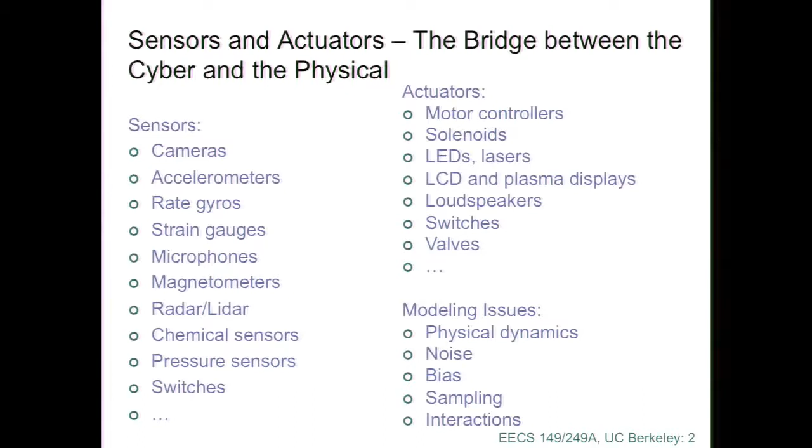Now, I'd like to start out today's lecture with a challenge problem. And this is a challenge problem for you guys. You're going to be hitting the world of practicing engineers or researchers or scientists very soon, if you aren't already there. And you are going to solve this problem, okay? In fact, I'd be willing to bet several of you in the room will be working on the technology that will prevent this kind of thing from ever happening again.

Humans are pretty good sensors, but engineers can build better sensors, and we're well on our way to doing that, okay? And if you can integrate those sensors with the machines and develop the control systems, you can actually prevent this kind of thing from happening. So this is happening as we speak. So cars are getting a huge variety of different sensors on them. They have been for some time. I mean, even the Model T Ford had a temperature sensor, okay?

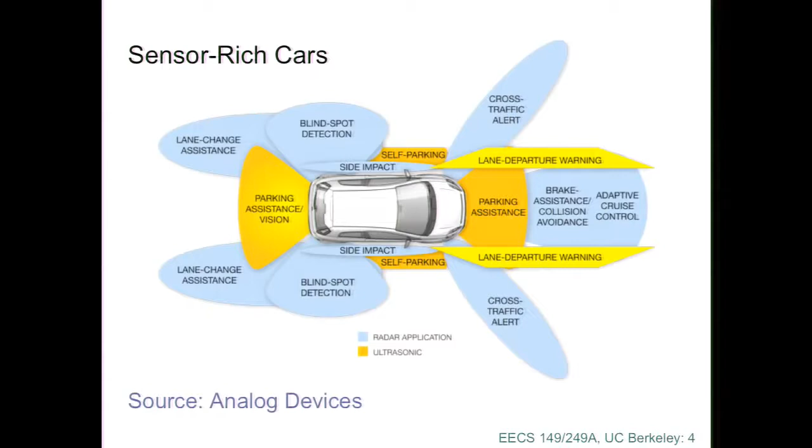Now, there, the feedback control system was a dial on the dashboard. If it exceeded a threshold, a human was expected to turn off the car because otherwise the engine would be damaged, right? You still needed humans. In that case, the human was the actuator, okay, to react to what the sensor was detecting. But we're going to see the humans play a diminishing role.

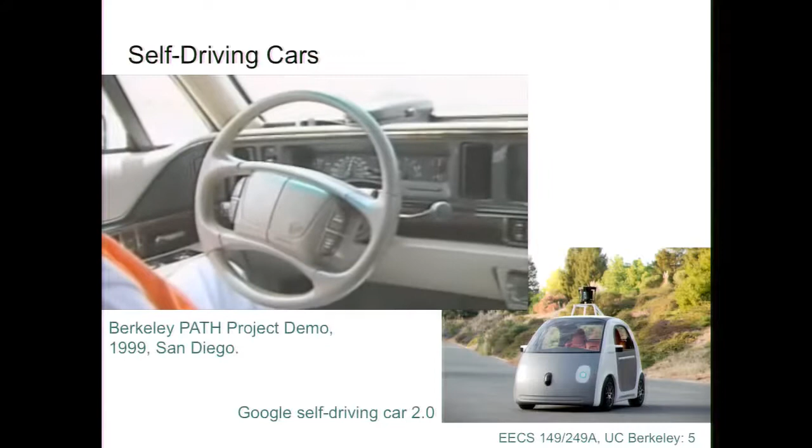And if you think this is such a brand new thing, this video was from a demonstration of a project, and it was filmed in 1999. Okay, that's 15 years ago. How old were you guys then? Okay, not many of you, you were kind of young, right? So self-driving cars were not invented by Google, but the technology has improved tremendously.

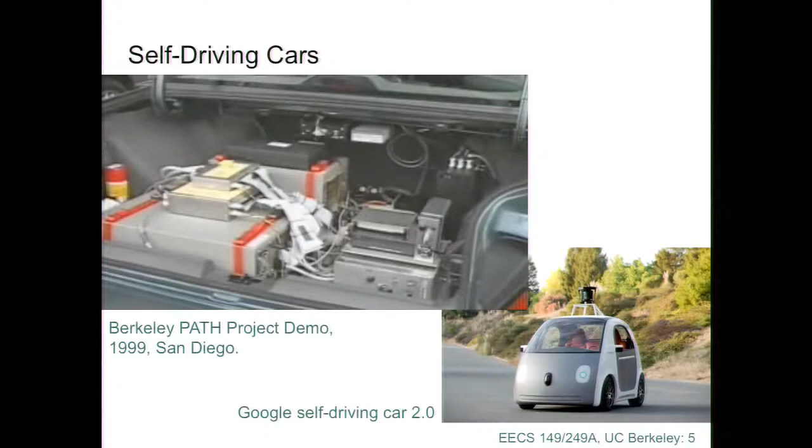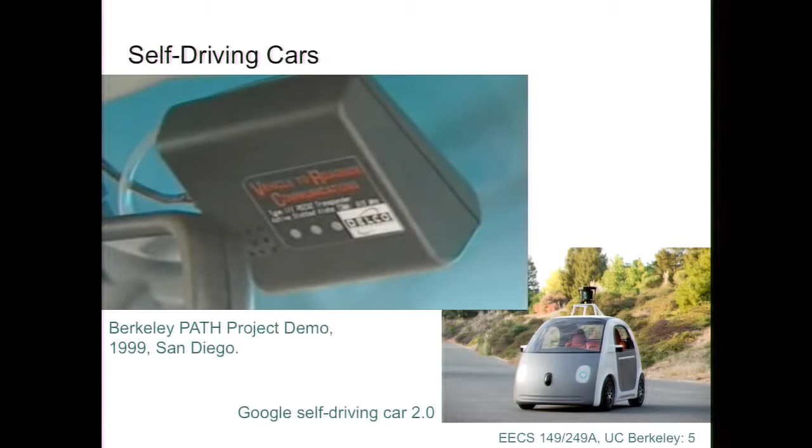When the PATH project developed this demonstration effort, first of all, they were using cars that were not drive-by-wire cars. So the steering was controlled by mechanical actuators. So they had to retrofit this steering with comb gears. They had a bunch of mechanical engineers that would retrofit this. That's the trunk full of computing equipment. Okay, so it pretty much filled up the whole trunk. And they had to retrofit it with the actuators that would control the car. But they were able to demonstrate driverless platooning on San Diego highways in 1999.

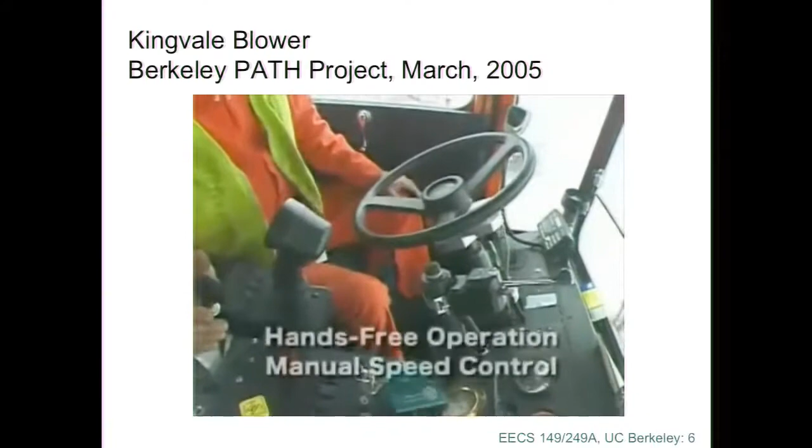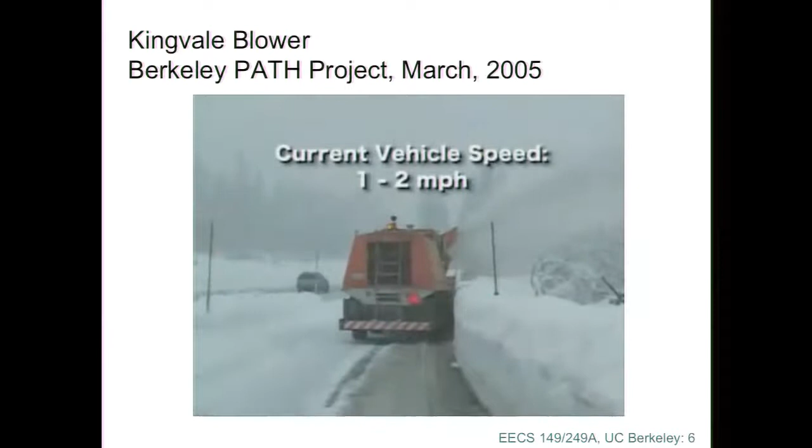Okay, that particular technology that they developed in that project has actually been deployed since 2005 in this context. It's used to drive snowplows in the Sierra. How many of you have driven over Route 80 in the winter in a snowstorm? Okay, if you haven't done it, I recommend it. It's pretty exciting. You can get absolute whiteout conditions, okay?

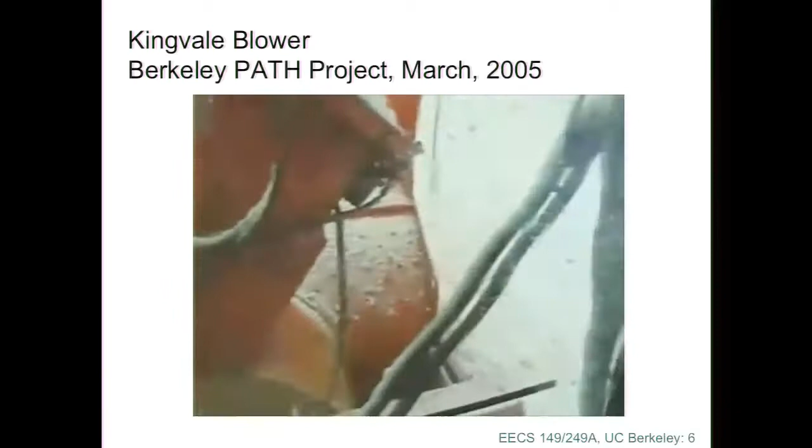And these snowplows have been outfitted with a system that will steer them to quite high precision. It's a little difficult to see it here, but this snowplow is 1 to 3 inches away from the guardrail, okay? And you can't even see the guardrail. No idea where it is, right? So let me ask you this. What are the sensors that are being used to control this snowplow?

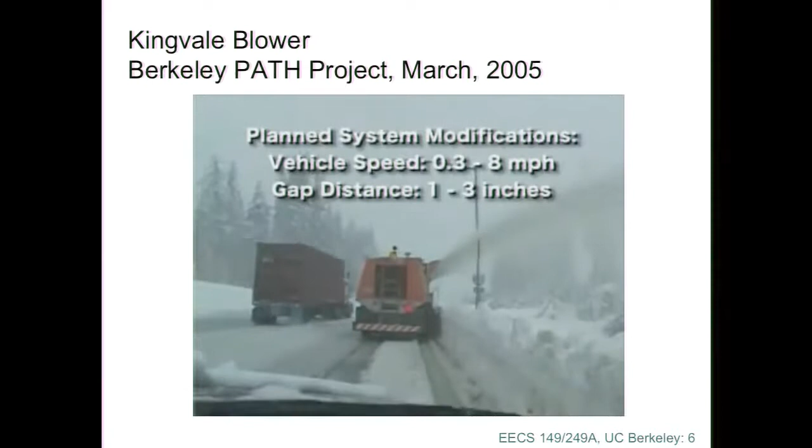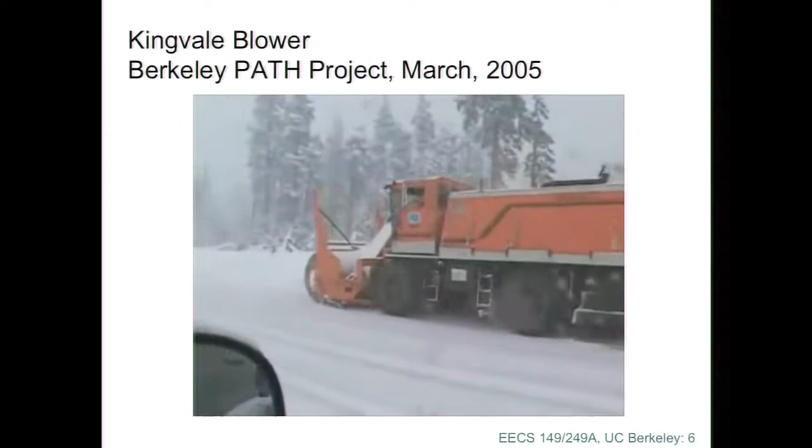Let's hear some suggestions. Yes? Passive IR. Sorry? Passive IR. Passive IR? No. Because you remember you can get whiteout conditions. That'll pretty much block any infrared signal. Yeah? GPS? GPS? No. Can't get 1 to 3 inches of precision. X-ray? What? X-ray. Oh, that would be an interesting one.

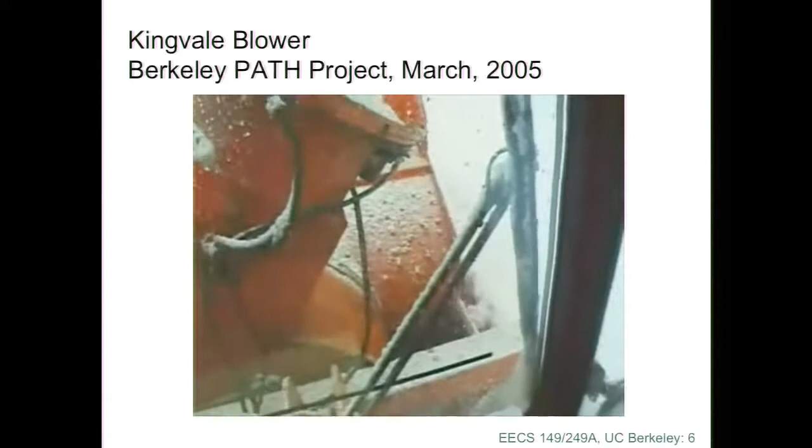To be able to see through whiteout conditions, maybe. But remember, what would you be seeing? You'd probably be looking for the guardrail, but guardrails are imperfect. They have gaps, they have dents. Where do you think the dents come from? Drivers driving over the Sierras in a snowstorm. So actually seeing the guardrail isn't going to help all that much.

Ultrasound? I'm not sure, but I doubt that ultrasound propagates too well through snow. In fact, have you ever noticed in a snowstorm how things get very quiet? I think snow is a really good sound absorber.

Inductive proximity sensing? That would be an interesting one, but again that would rely on the guardrail being undented and continuous. You'd need something that touches the guardrail all the time. Something that touches the guardrail? No, that would be foiled by ice, probably.

Other ideas? Yes. Radio beacons. Yeah, you could do that. You could make your own little localization system and put radio beacons. It would be an expensive solution though, because you have to power the radio beacons, which means doing a lot of wiring onto miles and miles of road.

What's your name? Alex. You nailed it. That's what they did. They just drilled a hole in the road every 10 feet or so, dropped a magnet in. 10 feet—why 10 feet? Well...

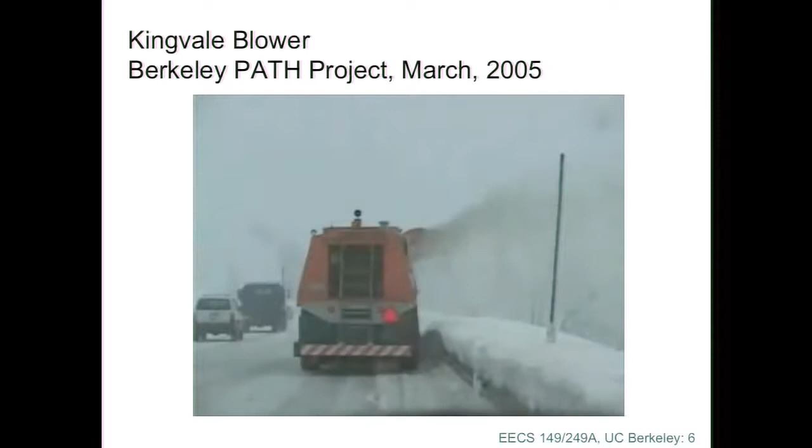In theory, you've all taken EE20, you've looked at the aliasing phenomenon. Roads in the Sierras are sinusoids, to a first approximation. And if you sample with a sampling period of 10 feet—given that roads aren't really high-frequency sinusoids, because cars don't deal with high-frequency sinusoids very well—every 10 feet is a reasonable period for sampling. And that's what they did.

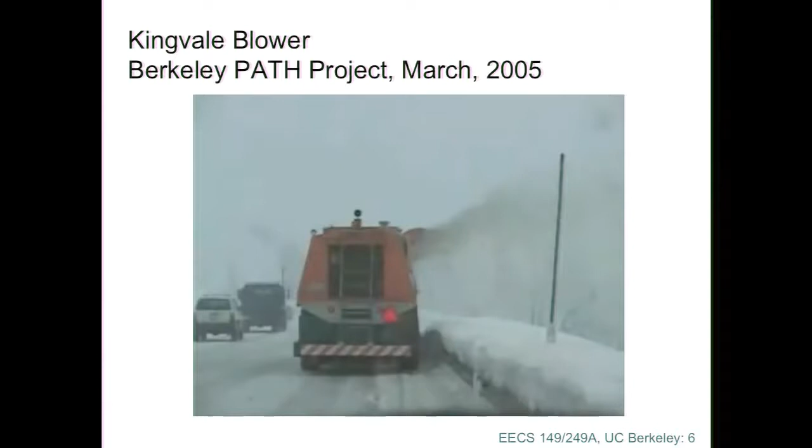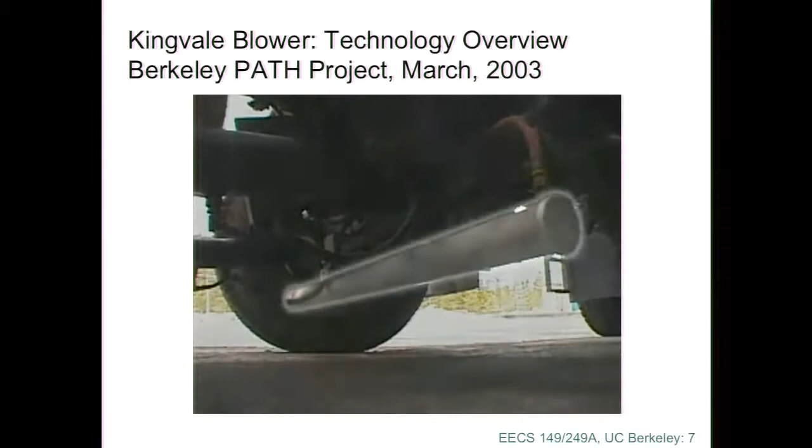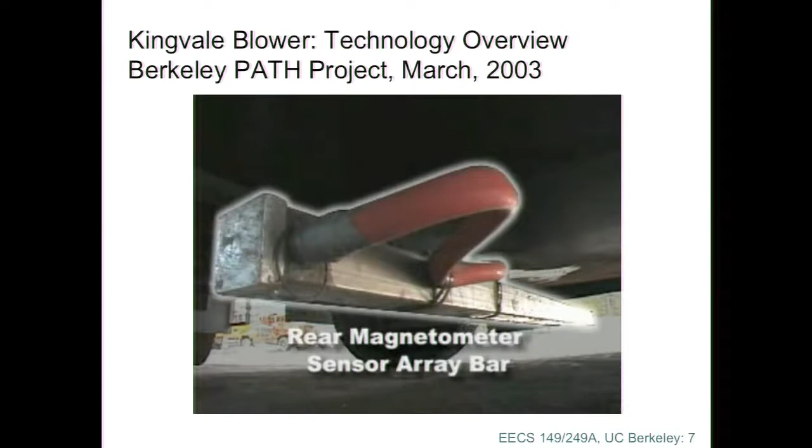So they equipped these snowplows—I'll start up this video—this is a bar that they put under the snowplow that has a bunch of magnetometers in it. And then they have a control system that just tries to keep the magnet in the middle of the snowplow. You can get the 3 to 4 inches of precision you need to get close to the guardrail with that.

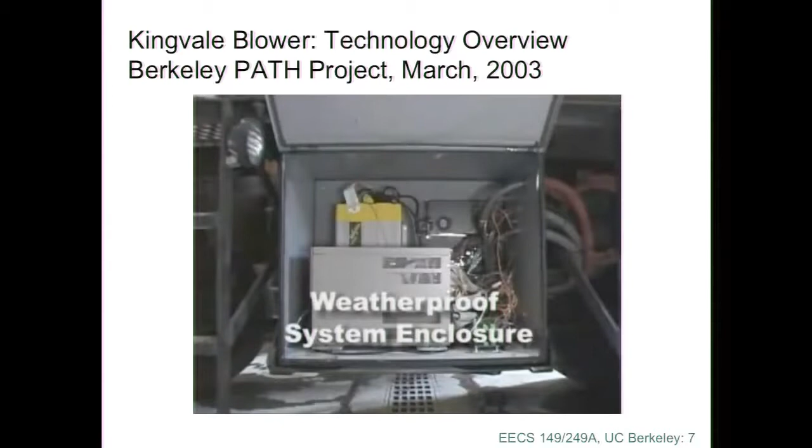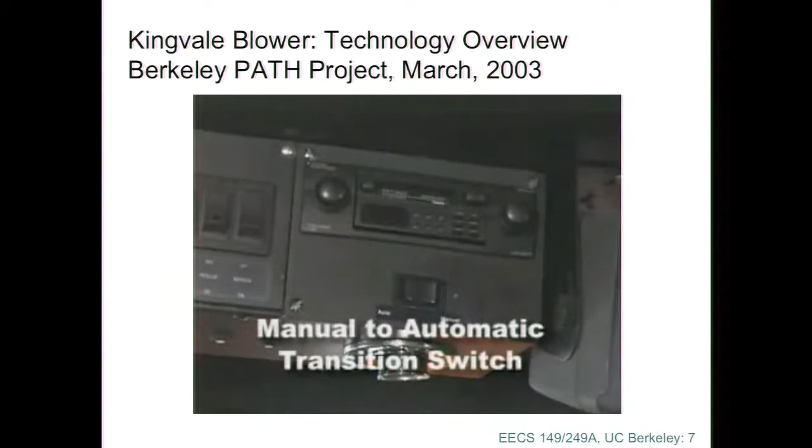So part of the art of working with cyber-physical systems is figuring out what the best sensing and actuation mechanisms are that are available to you. Sometimes incredibly simple sensors will work really, really well, and sometimes you need something much more elaborate.

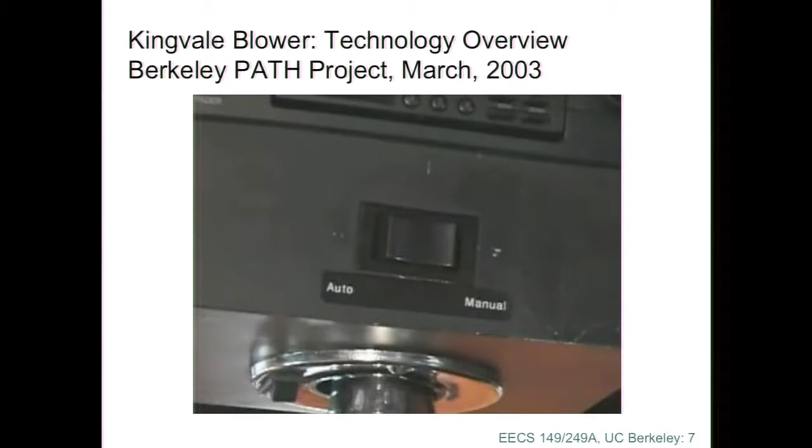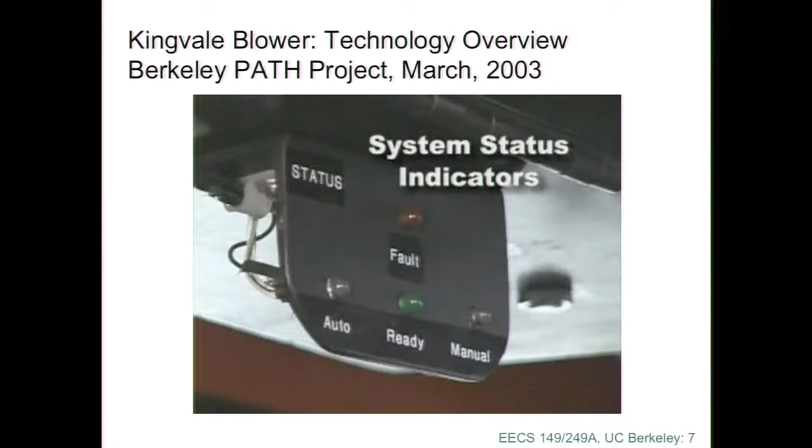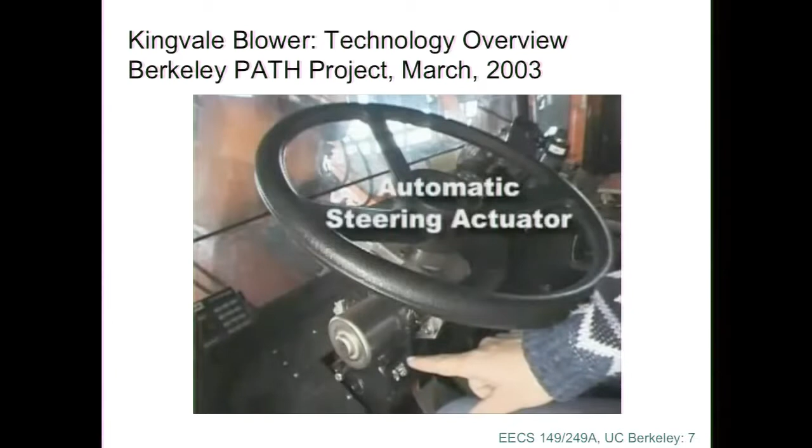GPS would be an extremely elaborate solution for this, and it would require precisions that would also require adding local GPS radio beacons. You can get 3 to 4 inches of precision with GPS if you add local beacons, and that might be a reasonable solution today—it might even be cost-effective because of the ubiquity of GPS.

But the solution that they picked here was relatively simple. It did require some modification of the infrastructure to embed those magnets, but the magnets don't require any maintenance. So infrastructure that doesn't require maintenance is generally better than infrastructure that does.

How do magnetometers work? They use an effect that's been known about since 1879, when Edwin Hall discovered it. It's called the Hall effect, which is simply that if you run a current through a conductor—a plate sitting in a magnetic field—the electrons get deflected by that magnetic field. They tend to prefer to go along one side of the plate, and you can measure a voltage from top to bottom on that plate. It's a very simple effect.

The infrastructure required to implement a Hall effect magnetometer—you could implement it yourself quite easily. Just hook up an A to D converter to one of these plates, and you could measure magnetic fields.

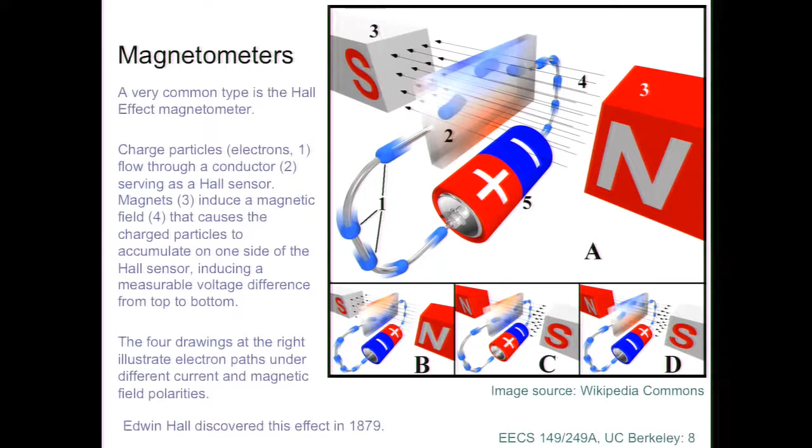Now, in the lab, we're going to use accelerometers. Accelerometers are a really interesting sensor—they've actually been used rather extensively in cars for quite a few years now, approximately 15 years. In particular, the first widespread deployment of accelerometers was in airbag systems. These accelerometers are responsible for deploying an airbag if you have a crash.

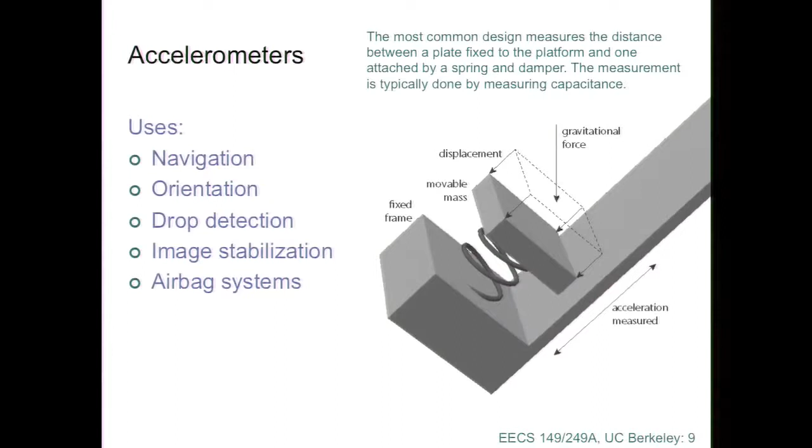Yes, you measure the capacitance, right? So if you've taken EE40, you hopefully understand more or less how that works. You measure capacitance. Now there's a challenge here, which is that you're not just measuring acceleration.

Look what happens when you rotate this thing in a gravitational field. When it's standing straight up, the floating plate is being pulled down by gravity. When it's standing straight up the other way, the floating plate is being pushed down by gravity onto the spring. And when it's in the horizontal position, the spring is presumably neutral. So the distance measurement depends not just on acceleration, but also on orientation within the gravitational field.

In fact, there's no way really to tell the difference between a gravitational field and an acceleration. There's no way to measure that difference.

If you're in a free-falling elevator, it feels like you're not in a gravitational field. You're just floating, you're weightless, right? And in fact it's exactly the same phenomenon, and there's no way for you to tell whether you're actually in a free-falling elevator or outside of any gravitational field. There's no way to tell the difference.

So accelerometers are, in fact, very good for measuring orientation.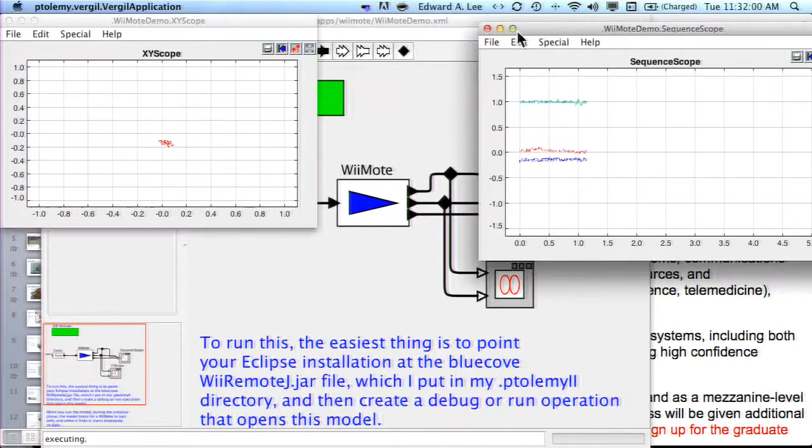All right, so this particular accelerometer is, in fact, the one you're going to use in the lab as an accelerometer, because it comes in a very convenient form factor, and it comes with this little Bluetooth connection, so it makes it relatively easy to hook it up to stuff when the Bluetooth works. It's a 3-axis accelerometer, and you can see it measures acceleration.

You can also see that it measures orientation.

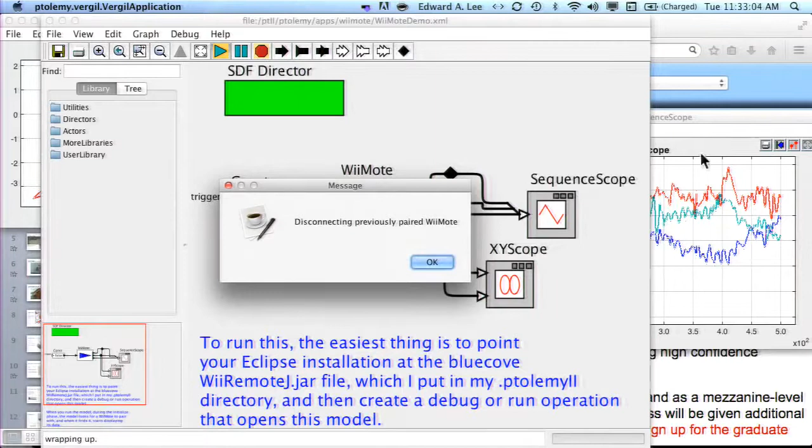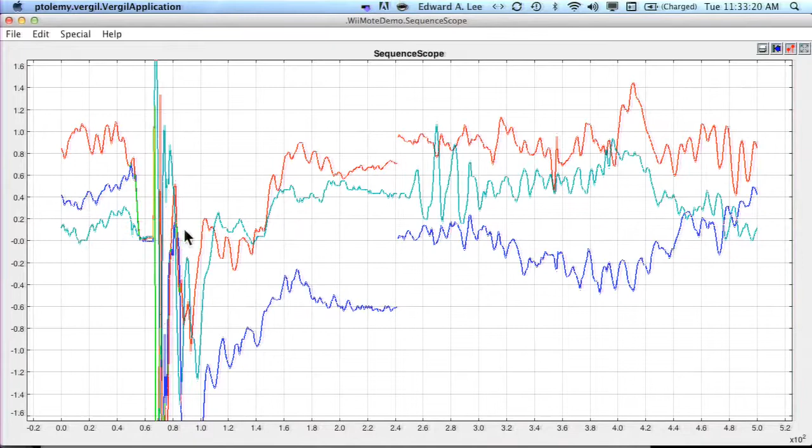And you can also see, actually, let me set this up because I would like to be able to capture what happens here. If I drop it, it will ever so briefly... that wasn't a very good specimen. Let's try this again.

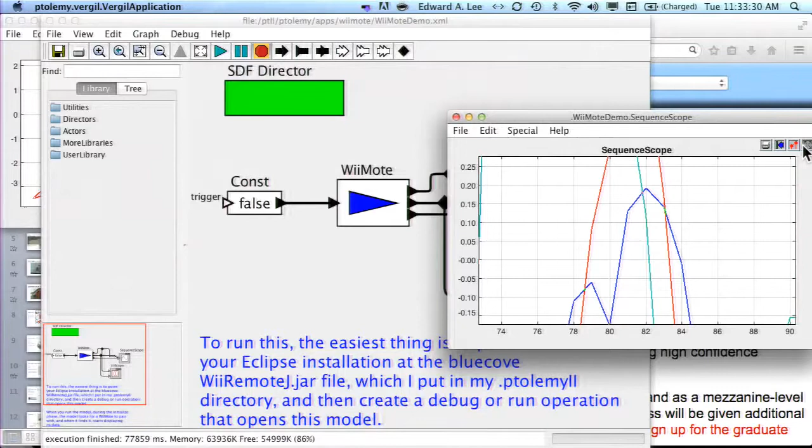See if it'll pair again. Come on, guy, pair it up. I think I had too much tumble in that drop. It doesn't want to pair again.

All right, well, you're going to have to take my word for it that ever so briefly, when you put an accelerometer into free fall, all 3 axes, which are actually 3 independent accelerometers, will all measure 0.

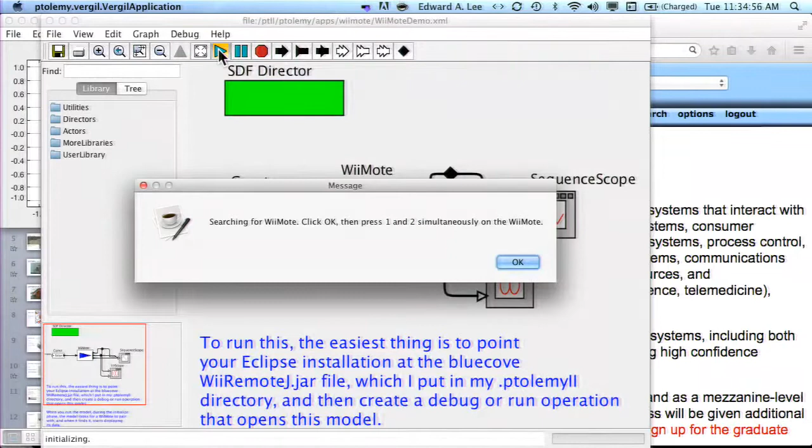This is actually routinely deployed as part of disk drives these days. So if you have an older laptop that doesn't use a flash drive and uses a disk drive instead, it will have a 3-axis accelerometer in it, and if you drop your laptop, it will retract the disk head before your laptop hits the floor. It prevents a head crash, which prevents data loss. Your disk drive may get smashed, but the disk itself is protected, so your data is protected. All right, so that's how that mechanism is done.

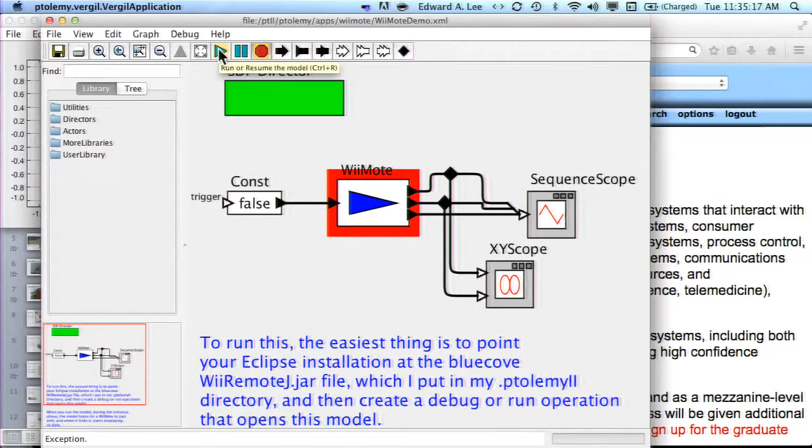Give this guy one more chance. Come on. Yeah, it won't pair. Yeah, I mean, you're going to have this problem in the lab too, by the way.

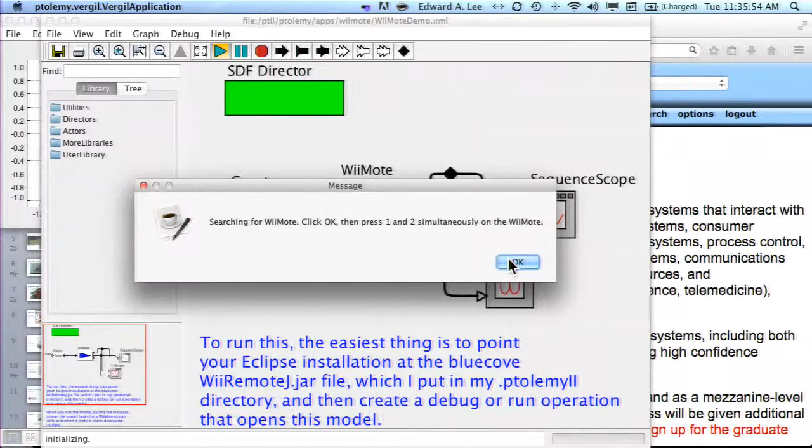When you get enough Bluetooth devices in a room, the protocol doesn't really work very well. I think I've actually got the graph, just look to the left. Oh really, was I looking in the wrong place? Okay, I didn't capture the graph. I think I've just... yeah, okay, all right. Well, you can experiment with that in the lab.

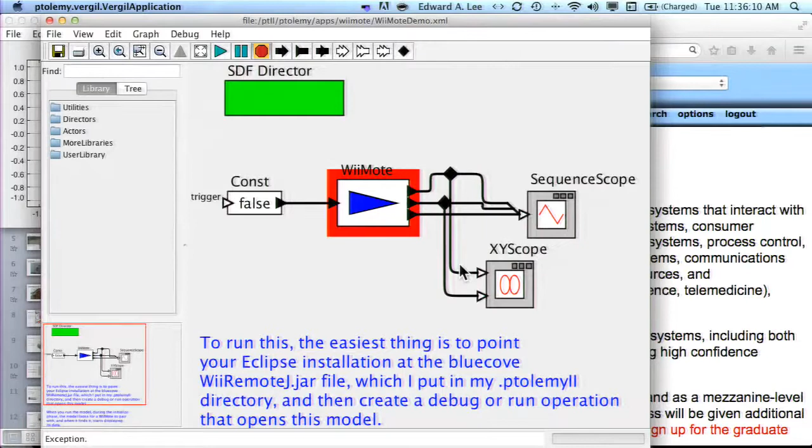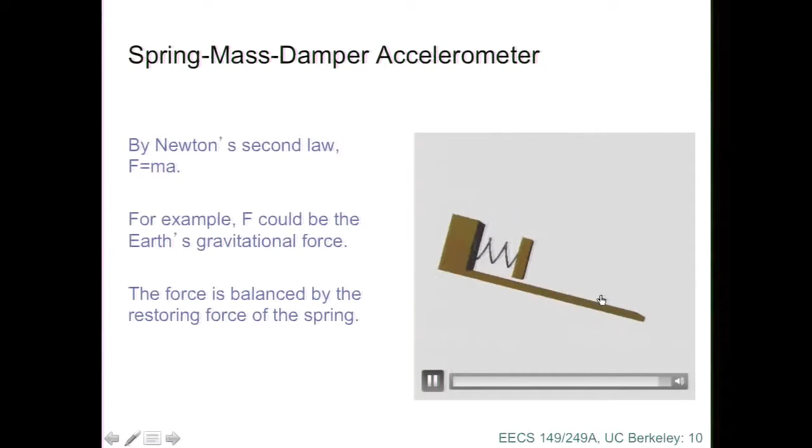Orientation versus acceleration, can't really tell the difference. Here's a model of the accelerometer. Now, one of the things you're going to notice when you read the chapter on sensors and actuators is that we put a lot of emphasis on the models for these things. And there's a very good reason for that, and it's kind of consistent with the general theme of this course.

You can work in this field as just a hacker, where you just try stuff until you get it to work, okay? But then you're not going to be the engineer designing those self-driving cars. Nobody's going to let you deploy safety-critical systems if you're just a hacker. In safety-critical systems, it's really important that you understand the components and the way they interact in your system. And in order to promote that kind of understanding, we put a heavy emphasis on the modeling side in this course and on the analysis side.

So how do you model an accelerometer? Well, F equals ma. Anybody remember that? Newton's second law, right? So this will also give you a sense of, some of you have asked me questions like, how much math do I need to have under my belt to take this course? And the answer is really that there's two branches of math that we rely on in this course. One is for the cyber side, and the other is for the physical side. And it turns out they're really quite different, those two branches of mathematics.

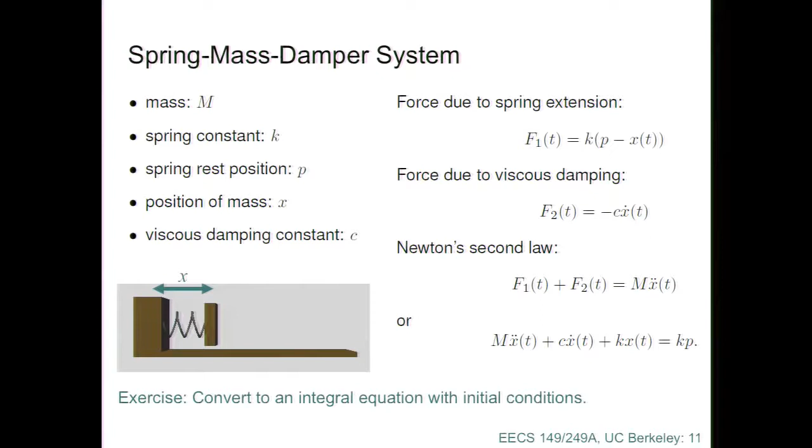And then you should also add to this the gravitational force. But in this case, this simplified model assumes the accelerometer is lying on a horizontal surface, so the gravitational force is having no effect. The component of gravitational force is zero.

To take into account the component of gravitational force, you need to do a little trigonometry, because what you're interested in is the component of the gravitational force that is in the direction of the axis of the accelerometer. This is the reason you have to take into account orientation if you're using an accelerometer to measure acceleration. If you fail to account for orientation, you're going to get numbers that are incredibly far off.

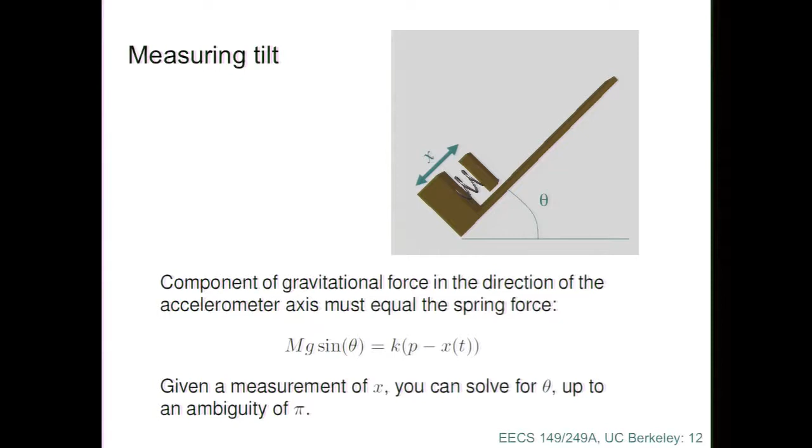So the comment from the back, the very first one—what's your name? Colin? Yeah, Colin. About drift, you can also get from this model, right?

This is very basic physics, right? Position is your initial position plus the integral of your velocity, okay? Your velocity is your initial velocity plus the integral of the acceleration.

If your measurement of acceleration is a little bit off, how fast does the error grow in your measurement of position? Say your measurement of acceleration is always biased to be a little bit positive—how fast does the error in your position estimate grow? It grows quadratically with time. So after a certain amount of time, you've got a pretty useless measurement of position.

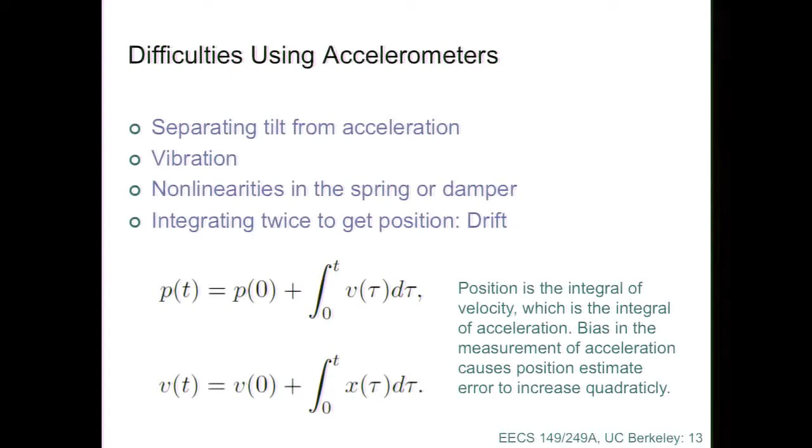Dynamic range—was it you that brought up the dynamic range question? What's your name? Billy.

But this one was implemented in Corey Hall, and it's a very clever design. The springs and the floating masses are just floating silicon fingers. He etched a bunch of silicon ridges and valleys, and inside of the valleys suspended a silicon finger that could swing from side to side. So you could then measure the distance between the fixed ridge and the swinging finger in response to acceleration.

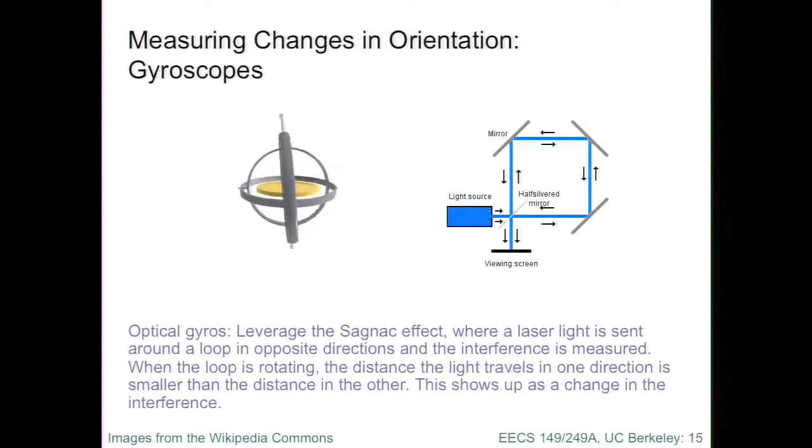So inertial navigation systems combine these things, and typically, because no matter how good a job you do with your accelerometer, correcting any errors, calibrating it, and combining in the gyroscope, you're still going to get errors that are going to compound. So a typical inertial navigation system will combine with GPS and will anchor your measurement according to a GPS signal periodically.

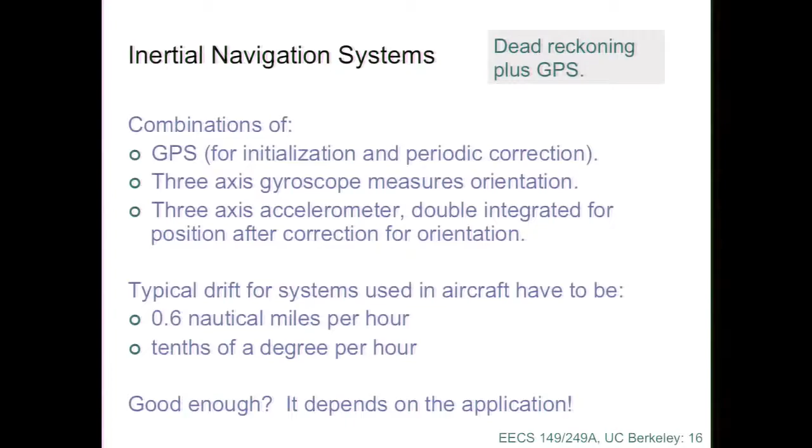Here's a potential use for accelerometers, courtesy of Ras Bodik. We've all had this problem of going to a web page that you can't really read on your small screen. So if you could really make good measurements, maybe you could pan your device over the screen. One time when I showed this in class, one student pointed out, well, what's going to happen if you're stopped at the BART station, you're reading the newspaper, and the train starts up? The newspaper is going to slide out from under you. It's going to be a very weird experience.

So some sensors are very simple. Strain gauges are devices where the resistance changes depending on flex. I had the pleasure of participating in one of the hackathons they had in the Invention Lab in May, and one of the people on my team used a strain gauge to make a really beautiful piece of jewelry. She took a string of LEDs that would change color depending on how they were bent, and attached a strain gauge to them, so you would get these really weird color patterns depending on the bending of this chain of LEDs she was wearing around her neck. It was really cute. I liked it.

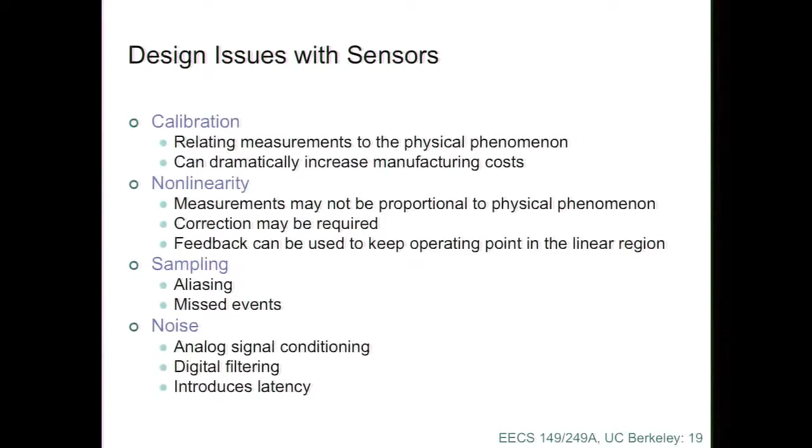That's aliasing, right? The set of samples represents not just one sinusoid, but many possible sinusoids that might have given you the same samples. Okay? So you need to pick your sample rates.

And by the way, one of the interesting things about taking this class right now, today, is there's a lot of hype out there these days about the Internet of Things, right? It's really, really hyped right now. And a lot of the Internet of Things, the way it's getting deployed these days, gives you almost no control over sampling rates, which makes it rather challenging to use this kind of technology in a lot of applications. But nevertheless, it's something to consider.

You also get aliasing phenomena with images, where images that are sampled can give you interesting distortions because of the sampling. Noise is a problem with all sensors, and it's a fairly sophisticated topic, and we don't really cover it in this course because it really requires stochastic signal processing to understand it completely. So if you take 126, 121, 226, and courses that depend on those, you'll get plenty of exposure to how to do this kind of signal conditioning, but we're not really going to cover it in this course.

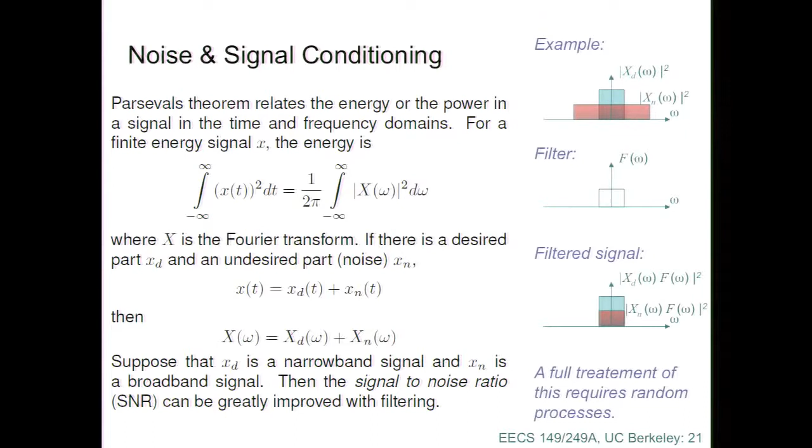So I'd like to talk a little bit about actuators. And in particular, I can promise you that many of you, in doing your projects, are going to fry an Arduino board or something, okay? And you're going to do it because you're not paying attention to the problem of delivering power to an actuator.

If you're a computer scientist, you think everything's just zeros and ones, right? So I just make it 1 and it'll go. I make it 0 and it'll stop. The physical world doesn't really work that way. You have to somehow translate those zeros and ones into a source of power, right? If you connect up an LED directly to a GPIO pin with no resistor, you're going to fry the board, okay? Because you're going to put a level of current through it that is going to make it extremely hot, and it makes the silicon melt, which isn't good for the chip. So you have to pay attention to these things.

Motors are particularly interesting ones because, in a lot of applications, they require substantial power. So I was just talking with a fellow that we're working with on a research project who happens to come from a Japanese company called IHI that is a large industrial conglomerate.

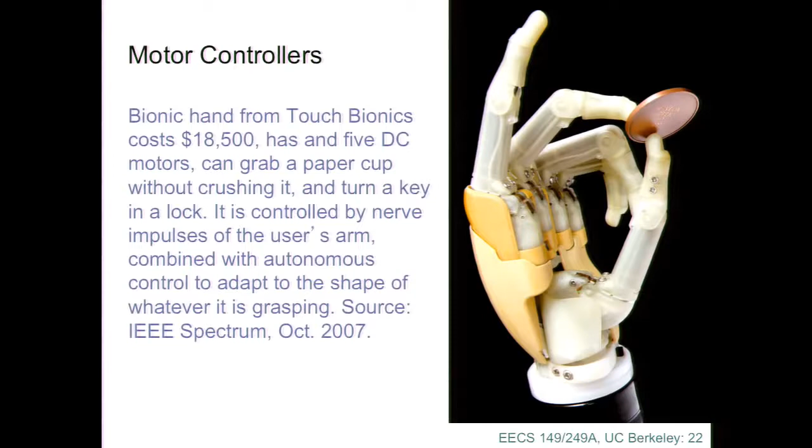If you increase it to 12%, you will apply more force with the motor. Okay? Decrease it to 8%, you apply less force. And you can use this as a feedback system, just vary the amount, the percentage, the fraction of time, the duty cycle at which you're applying this voltage.

Delivering power for a signal like this is easy, comparatively. It's just a switch. You just need a switch that can handle large currents. And making a switch that can handle large currents is much easier than making an amplifier that can handle large currents. You just turn it on and off.

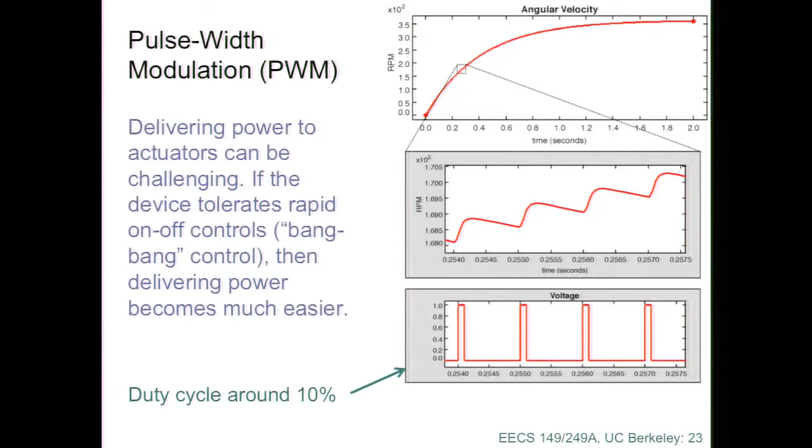If you look closely at the details of the model, you'll see that, well, the motor is actually accelerating. Its angular velocity is increasing while the voltage is on and decreasing while the voltage is off. It's decreasing because of friction and electrical losses. But nevertheless, you get an overall rather smooth motion.

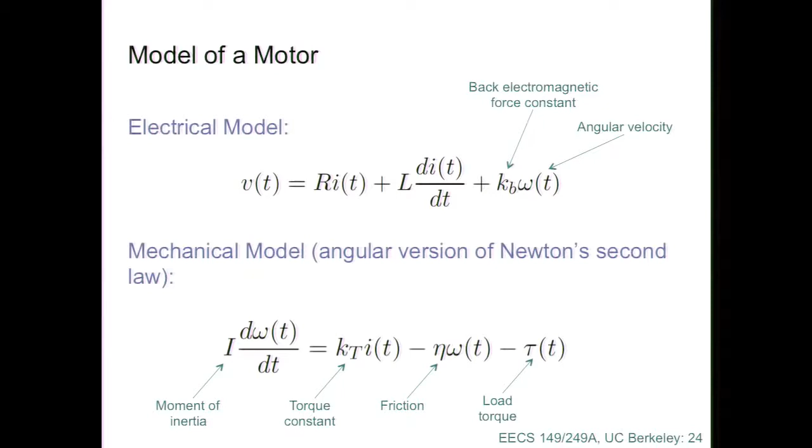Okay, so this is the limit of what we'll do in modeling physical systems. If you can understand these equations, you're fine. We're not going to ask you to derive equations like this or do the physics. That's just for the physical modeling side.

All right, cameras. I mentioned this infrared camera here in the Wiimote. The Wii is kind of an older gaming console. The Xbox introduced the Kinect, which is also a camera-based system.

The way the Kinect works is that it floods the room with an infrared grid. You can't see it because humans aren't very good sensors, actually. We can make machines that are better sensors than humans, and the machine can see the infrared grid. It can do very precise measurements of the distance of an object from the Kinect by looking at how big the squares are.

Not quite, because they'll be affected by the orientation of the surface. But they can look for keystoning, which is the phenomenon where if you send out an infrared square and it hits a slanted surface, it looks like a rhombus instead of a square. So you do that analysis on the visual system and you can tell about orientation and distance of objects relatively easily.

There's a lot you can do with cameras. One thing I'd like to emphasize is that I think we're going to see much more interesting uses of cameras over the next few years. I think the emphasis in cameras so far has been anthropomorphic. People always think cameras are trying to do what the human visual system does, so we're trying to get a rectangular field of view.